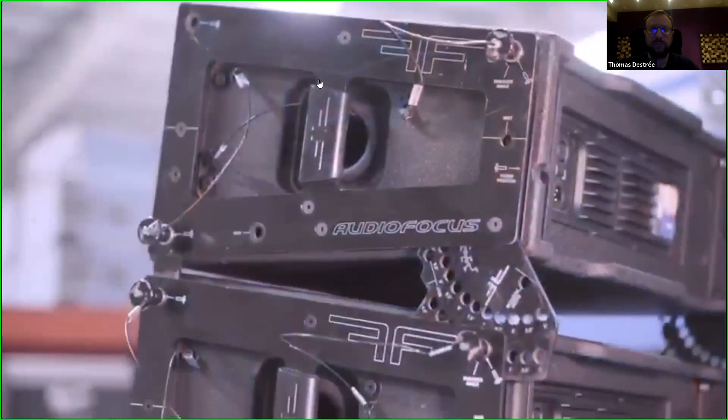What we have currently in our inventory are a bunch of Ares 8s, B18s, MTX 218s and CM15s. The reason we went with Audio Focus is because of its size to power ratio, as well as the fact that they are an actively powered system helps us deploy the system much easier, quicker in most venues around the country.

So the reason we went in for the Ares 8 system and this little package is because it packs a lot of punch in a small package. The size to power ratio is brilliant and helps us to cover most venues with pretty much no effort at all. A big PA with a small delay stack in larger venues, whereas just the flown system, the LR in mid-size venues works absolutely perfect with the Ares 8.

So here at Reynolds, we like to spend good time in pre-planning and prepping our systems for shows to come. With Ease Focus, that enables us to do that very easily with the Ares 8. We can pop in a system, pop in venue dimensions, get a prediction done so that we know exactly what we're going to hear once we're in the venue. It really helps speed up the process, and Ease Focus all the way.

The Audio Focus Ares 8 and B18, one of my most favorite combinations from the Audio Focus Ares line. I really love the way this system integrates with each other. It's very easy to either ground stack or fly the system. The way the hardware is integrated with the box is awesome.

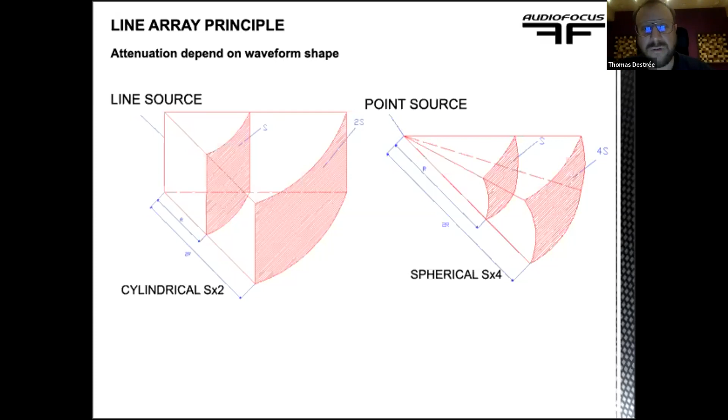So the main aspect of this and the big advantage is that the dispersion becomes cylindrical instead of spherical. So when you double the distance, the volume of the sound expansion is 2 times less. This means that we only lose 3 dB when doubling the distance instead of 6. It's the main advantage of line arrays, and this is how we control the sound in the front.

So to be able to reach those goals, we have to fulfill some criteria. Let's say a line array will need to go for 95 dB at 30 meters. A point source would be way more up in volume at 1 meter than a line array. So obviously all the audience area will be more homogeneous with a line array than with a point source.

So to be able to do that, the line array must fulfill some criteria that have been developed by Christian Heil and Marcel Urban in the 90s. Those criteria are that the total sound source must be planar and in equal phase. The total surface of the speakers must be at least 80%, and the speakers must be really close to each other, because if the space is more than half the wavelength, they don't behave like one speaker only. So the goal is really to build up one speaker. A line array is considered like only one big speaker on each side of the stage.

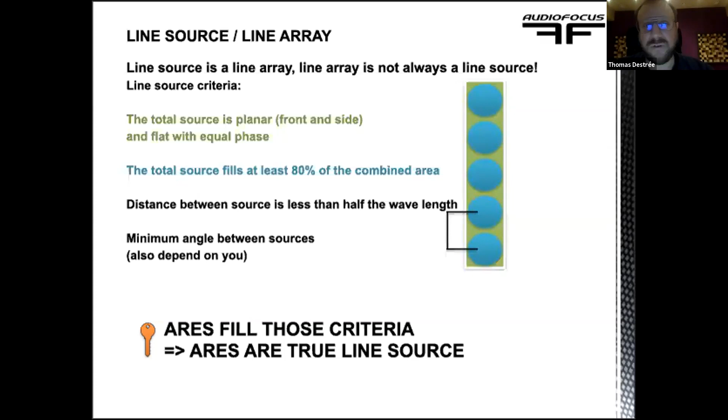And we can say that Ares 12 and Ares 8 fulfill those criteria. So Ares 8 and Ares 12 are not only line arrays, but are also line sources. Line sources still have some limits. The limit of a line source has been observed and calculated from the optical aspect of physics. And those zones are called the Fresnel and Fraunhofer limit.

In the Fresnel zone, the line array behaves like a line source. And after that, it starts to behave again like a point source. So it looks a bit like this. This is the near field, and this is the far field. So it acts like a line source there, and starts to act like a point source after the Fresnel-Fraunhofer limit.

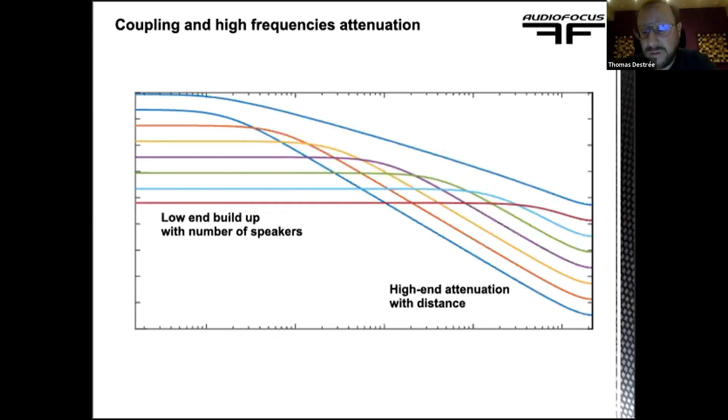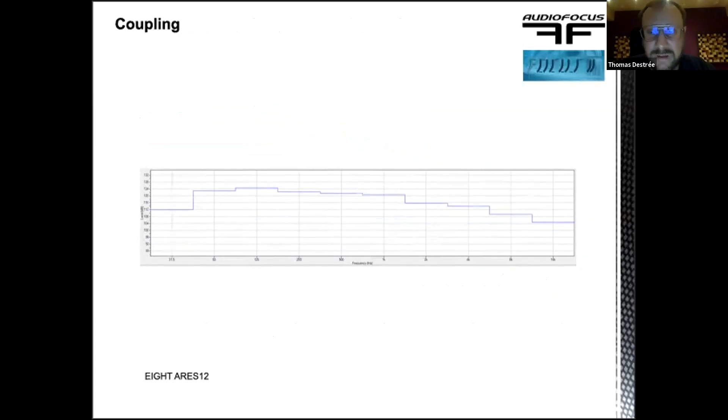So for example, this is one RS12 alone measurement, and this is 8 RS12. So you can really see we are like plus 20 dB at 125 hertz. And if we keep the simulation going, you see the RS12 being flat at 16 meters and falling in the high end at 64 meters.

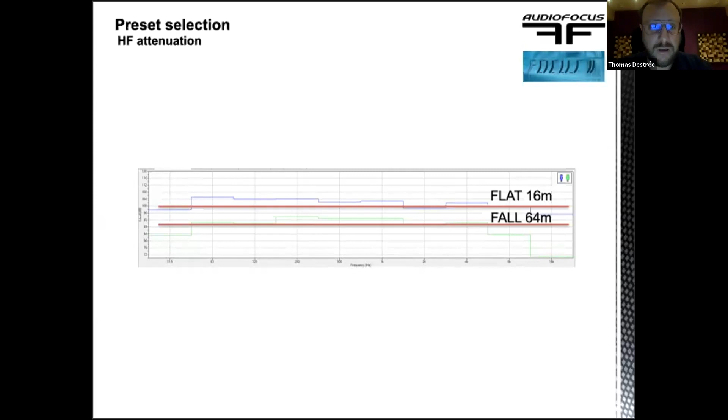So how does Audio Focus manage this problem, these acoustical rules, in their speakers? So we got some presets, and presets are the solution. So inside the presets of the RS8 and the RS12, there are two banks. So the first part of the name of the preset is the preset number, P16, for example. The second part of the name is the number of cabinets you use. So in this example, you use 12 RS12 per side, or at least in one array, and then the distance.

So obviously, the top cabinets will shoot further away in the far field, while the bottom cabinets will shoot in the near field. So the high-end reproduction of the bottom is not the same as the top, as we've seen before, because of the distance compensation. So if you load the right preset and deploy the system as it should be with the preset and the simulation, you obtain a really flat response everywhere in terms of SPL and in terms of frequency response.

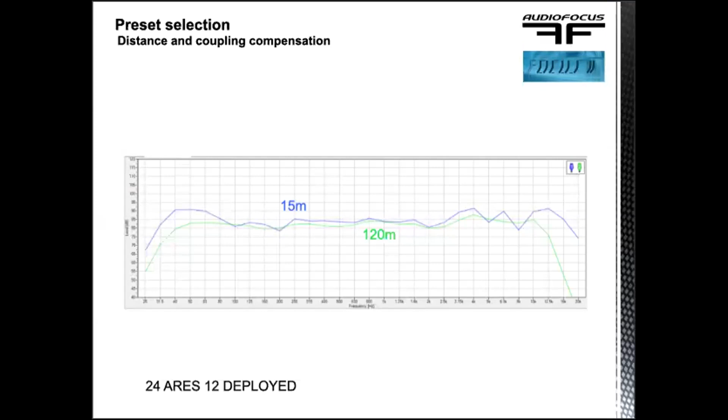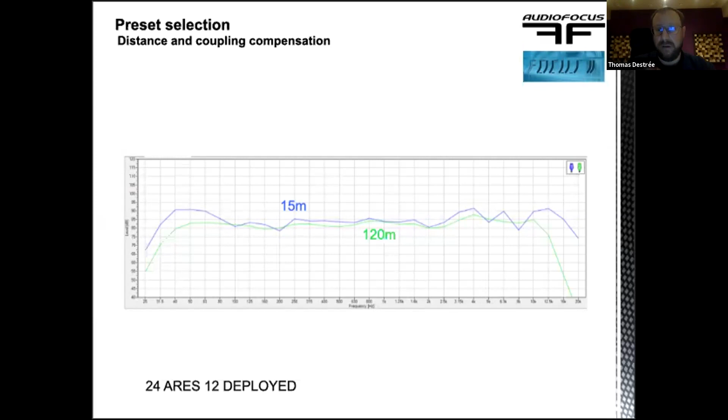So for example, here you can see 24 Ares 12 deployed, and it's almost totally the same response, at least between 100 hertz and 12 kilohertz, between 15 meters and 120 meters. So it's really a huge improvement based on plug and play presets that you don't have to calculate with Smaart or anything in the tuning on the field. So everything is done before the show, and you just plug and play the system once you're at the venue or at the outside gig.

So what is inside the RS12 and RS8? So the RS12 is a three-way line array. The high end has two cylindrical transformers. The shape of the wave going out of the high-end driver is spherical from the start, and the goal in building a line array is to have a ribbon shape of the high-end output at the end. So the top and bottom of the transformer are really close to the next one on the other speaker, so it behaves like one big vertical speaker arrangement. So this is the transformer. It's a bit of a diamond shape inside.

The mid is reproduced by an OEM Eighteen Sound 3-inch driver. So there are eight 3-inch drivers. We chose a 3-inch instead of a bigger one because the centers of the speakers are closer to each other with a 3-inch, so the line source criteria are better with this kind of speaker. And then the low end is a 12-inch OEM Eighteen Sound also. It's a really powerful speaker, one of the most powerful and respected 12-inch speakers in live pro audio.

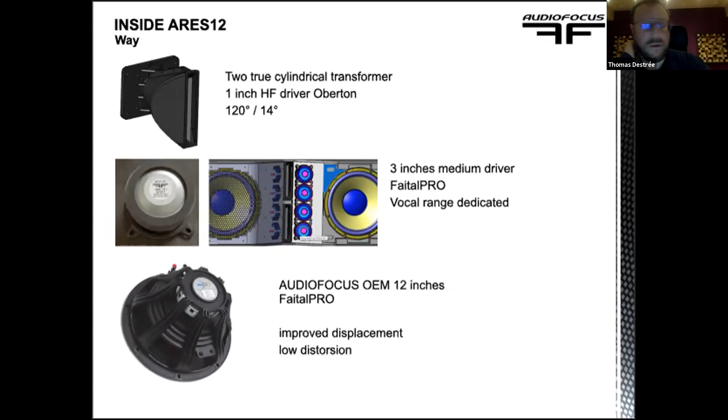The RS8HQ, and the RS8A also, is a bit the same. So it's the same high-end cylindrical transformers with a 3-inch HF driver from B&C. And the low-mid is 8-inch B&C speakers also.

So now about the amplifier. Most Audio Focus products are active speakers. We call them active speakers because the amplifier is inside the same cabinet. All our amplifiers are from Powersoft. Those are Class D PWM amplifiers, so pulse width modulation. The goal of PWM Class D is to have a lot of efficiency with the integrator, and you have like 95% efficiency. The Powersoft technology is also PFC. PFC means power factor correction.

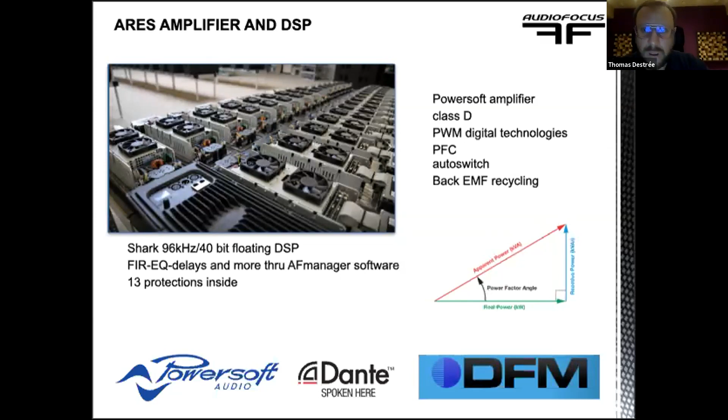So this is in red the power you have to give to the amplifier, and this is the power it will give to the speakers, plus the inside usage of the DSP and the fan, but it's really negligible. So the goal is to make this angle as small as possible, so the apparent needed power is almost the same as the real power you need. So this is an overview of how PFC works.

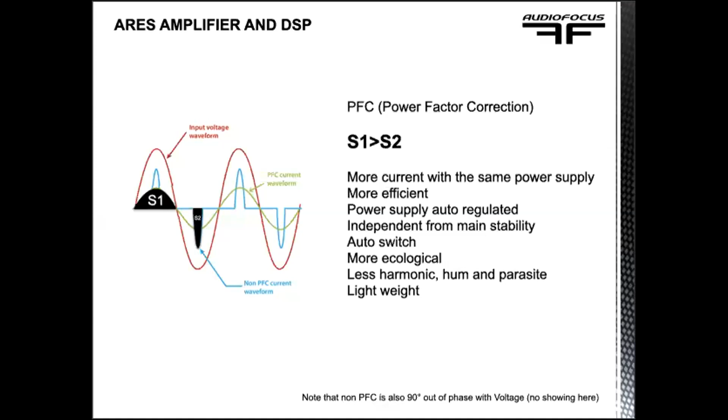Also, there are a lot of other advantages of the PFC. It's obviously more efficient, but also the power supply will regulate, because the input voltage is not always perfect, like on this red drawing. The power supply could have a lot of harmonics and problems, and also fuel generators have frequency variation, things like that. This is not a problem for the PFC. PFC will regulate all of this and clean all the input of the PSU.

Also, it's important for us that more efficient also means you need less current, so it's ecological. It also filters everything in and out of the PSU, so you have less harmonics or less parasites, and it's lighter weight because you need a smaller amplifier to do the same job as a big amplifier.

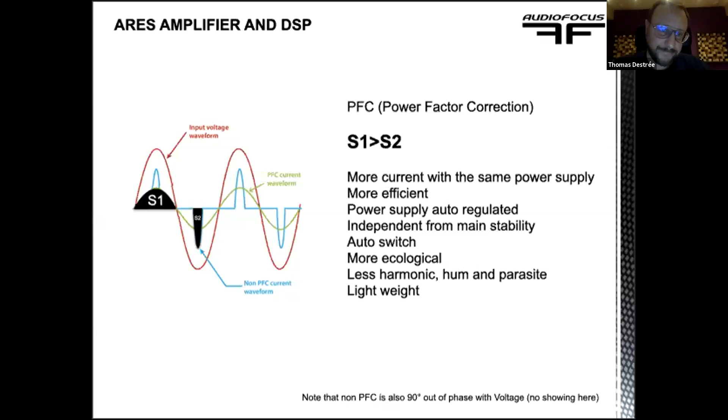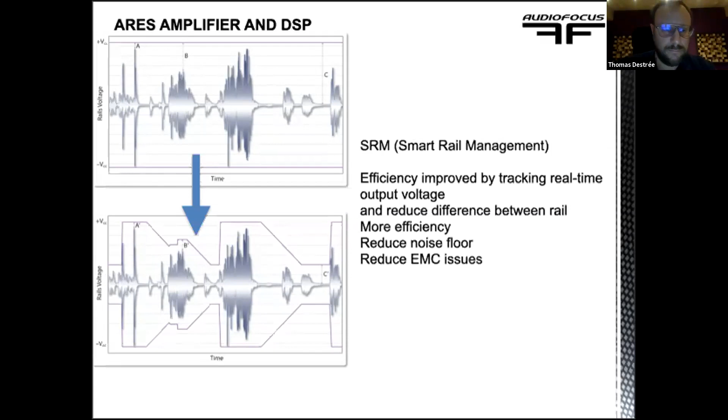So those slides were about the amplifier. The other part inside is the DSP. The DSP is a DFM DSP made in Germany with local components. The DSP has a 96 kilohertz sampling rate with 40-bit floating point.

It's basically a 32-bit mantissa with an 8-bit exponent and a sign bit. So the dynamic range, because we're talking more about dynamic range than signal-to-noise ratio, is really, really high. It's so high that you don't have noise from the converter; the noise just comes from the electronic components of the DSP. The DSPs inside DFM are made by Analog Devices, the famous SHARC DSP.

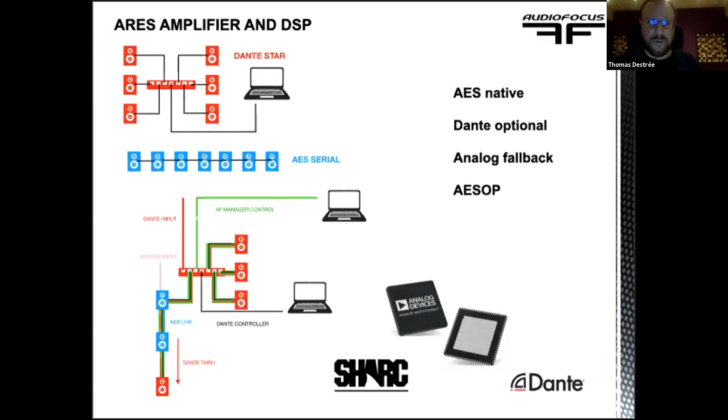Also, if I can go back, how do I go back?

Yep. Also, the DSPs are asynchronous DSPs. This means that they don't necessarily have to have a clock. They can clock on themselves. And so it's better for digital interconnection between speakers and with the mixing desk. And so it can handle a different sample rate more easily than other DSPs.

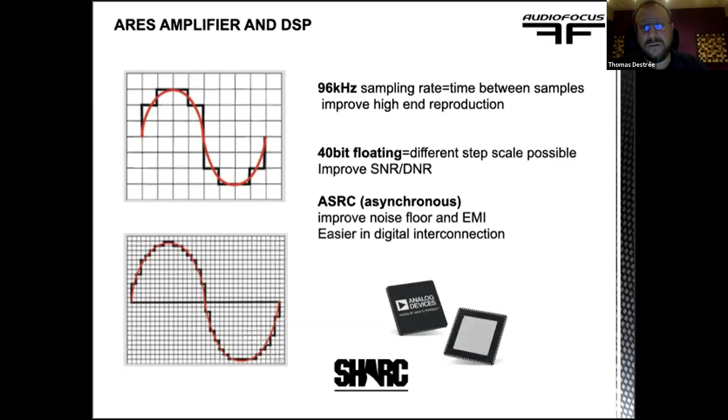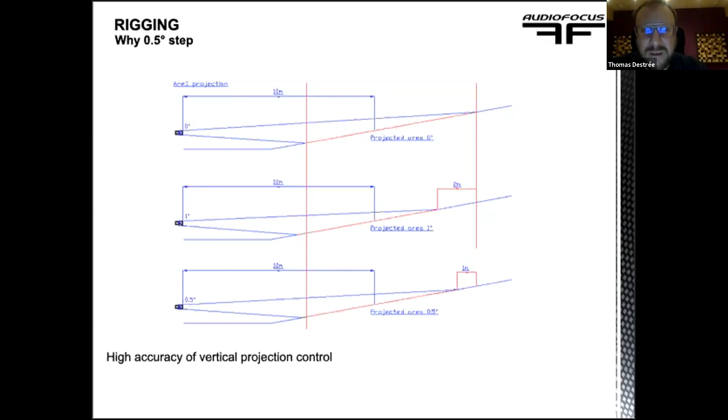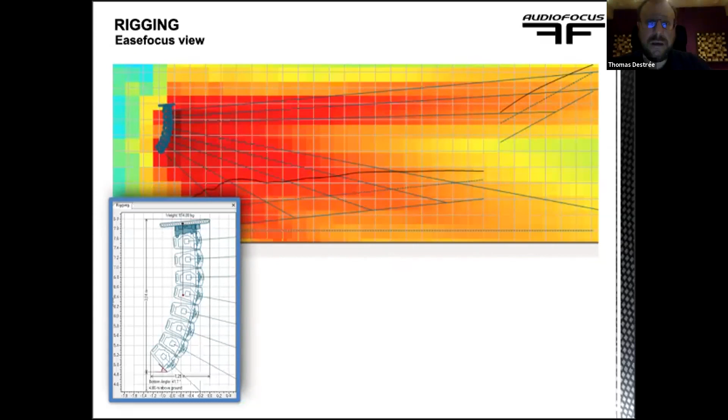Then the rigging can go up to 14 degrees. So we can split a beam of ARES12 in 2 separate parts, for example, for a balcony and a floor audience area. You can see the result on the SPL on EASE Focus. And so the sound will go where you want it and not be wasted in the middle of the two areas where nobody stands. See, this is a real life application in Belgium with ARES12.

And so, for example, in this particular theater, which is almost 1,000 seats, a difference of 0.5 degree means 2 or 3 rows, so it's like 75 seats. So 0.5 degree is a precision needed. Also, the 14 degrees give the ability to split the angle of the beam and only put sound on the balcony and on the floor and not in between. So yes, the rigging is quite versatile.

Now about the subwoofer technology. All Audio Focus subwoofers are with speakers in a direct radiation with bass reflex and also in transmission line. So a lot of energy goes back inside the subwoofer because obviously the speaker is moving both ways almost the same. So not to lose all the energy inside the speakers, the best solution for us is the transmission line.

So this means that in front of the speakers, 90% of the front is an emission zone. Not working always at the same time, because the bass reflex works at certain frequencies and the transmission line at others. But this is the way to make it the most efficient possible. So also we put a lot of braces inside the subwoofer to keep everything really tight together and really strong. And you have no moving part, you have no vibration or mechanical noise that could parasite the sound you want to reproduce.

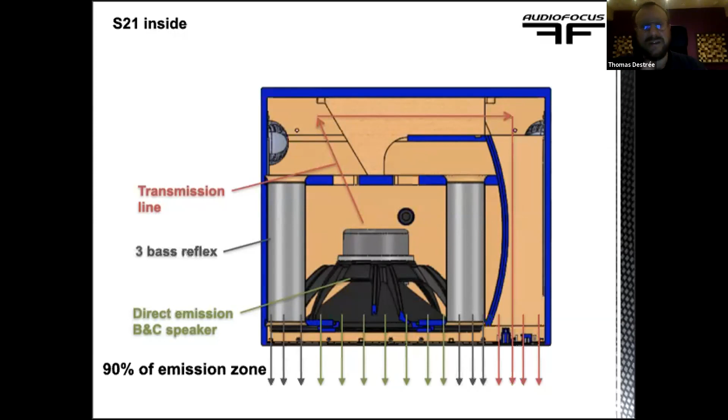So this is an inside view of the subwoofer. The subwoofer has the same amplifier and DSP as all the range. And now let's talk about how the system works together. So we think of the product as a solution for touring or for installation and sound reproduction. So we want to give the possibility to work as fast as possible. This is why we have active speakers with no need to cable and with presets inside. And also we want every top to work with every sub and be time aligned and phase aligned by default. Plug and play, they can work together.

So you can build two-way speakers with the VENU and the CM and the FRX. You can build three-way speakers with the subwoofer working with every top, and four-way. The most obvious way to do a four-way is the ARES12, which is a three-way, with the S21 as the fourth way. But every sub from Audio Focus can be a sub, but can also be a bass. So it's like the B18 that Sohail introduced in the previous video, that is a bass reinforcement for the ARES8.

The S15, the S21, the S18, the 218 HQ can also be a bass subwoofer. So if you put your subwoofer in a bass configuration by only loading the bass preset, you mix it with the S21 in infra and a top, and you have a four-way system. So you can really build the system in all the ways that you want and in all the configurations possible.

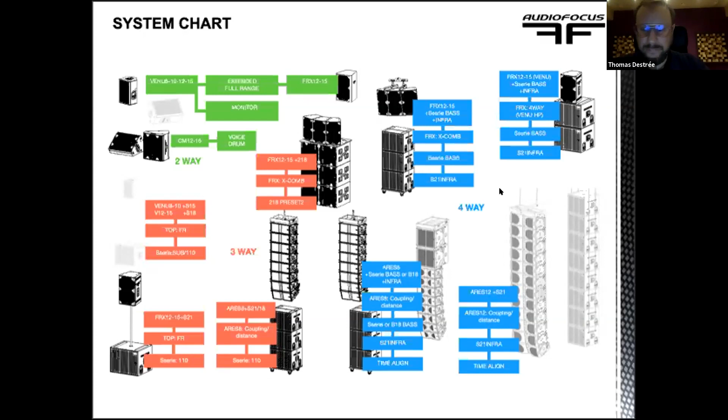So like 95, 97% of the speakers that we sell are active speakers with the amplifier inside. So for us, it's the state of the art, with the plug and play, with the fine tuning possibility, because it takes less space, because it's less cable, because there is no mistake possible with loading not the right preset inside the amplifier, because the power of the amplifier will always be perfect, because you won't also buy a big amplifier to drive all your speakers. So if you have a line array with a big amplifier, this big amplifier will also drive your smaller monitors. It makes no sense. It's better to have an amplifier matching the power needed inside the speakers.

Also, the cable that takes space in the truck also takes space on the stage and might be really long. And some, especially in the low end, you could have a damping issue or different sound reproduction because of different size of cable. Still, we provide a bi-amp solution or passive solution with our own amplifier and processor.

So the amplifier could fit some solution if you already have some cable installed inside a building and you can't put some new power supplies, things like that. You have the bi-amp solution. This also perfectly works for touring. We do provide some amplifier rack with the power conditioner, amplifier inside, and everything ready.

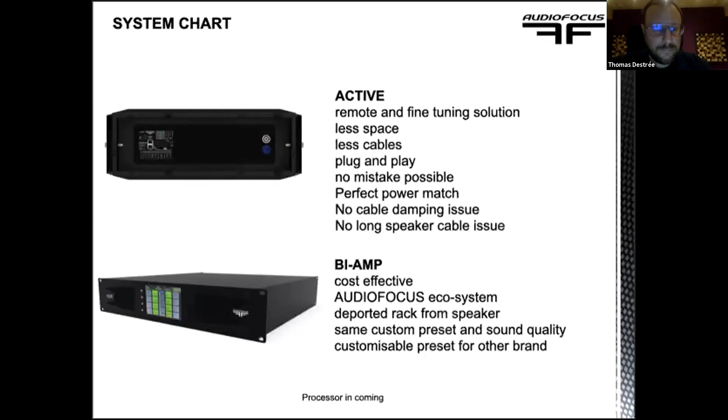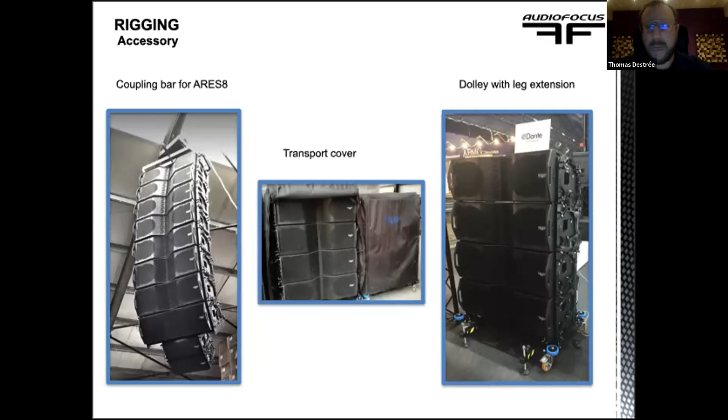The other part of the system is all the rigging elements. So we provide rigging for the ARES12, for the ARES8. We have some rigging to be able to stack the speakers on top of sub. We have coupling accessories in ARES12 and ARES8. We have also all the transport dolly, the rear dolly, back dolly, the fly case, the transport cover, rain cover. You have a lot of different options to build your kit as you want.

Here you can see some dolly option for the S21 on the back with a hole, so you can still have the control if you want to let the dolly in, or on the bottom, so you have a ready to rock system out of the truck. So you can also leave all the cable in place. This one has a brake on all the wheels, so the dolly with powerful magnet also doesn't make any noise when you are working with the dolly left on the subwoofer. So also all the subwoofers are flyable.

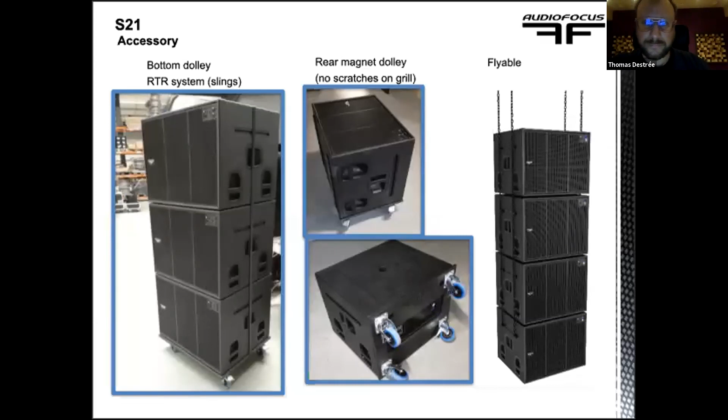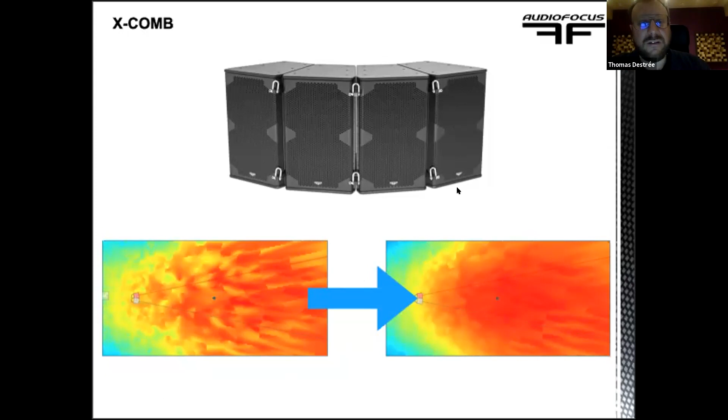So about the X-COMB technology. X-COMB is an audio focus process to manage the constant curvature angle from FRX and also CM series. So it means that if you stack ordinary speakers next to each other, you will have this kind of result. This is the simulation inside EASE Focus with the actual FRX. If you load the right preset for the X-COMB technology, this is the result that you will be given.

So this provides a homogeneous horizontal sound reproduction of the speakers. It's a psychoacoustic procedure that I can't tell you obviously how it works in details, but we are canceling problems to make it perfectly homogeneous. Also, you can use as many speakers as you want, or at least you need for this configuration. And it's easier to do because those are self-powered speakers.

So if you want to do some X-COMB with an amplifier, you will waste a lot of amplifier channels to load different presets in each speaker. But with active speakers, there is no waste. You just load a different preset on each speaker and it will give you the result immediately. So really plug and play, and a big advantage of having active speakers with a preset bank inside from the manufacturer.

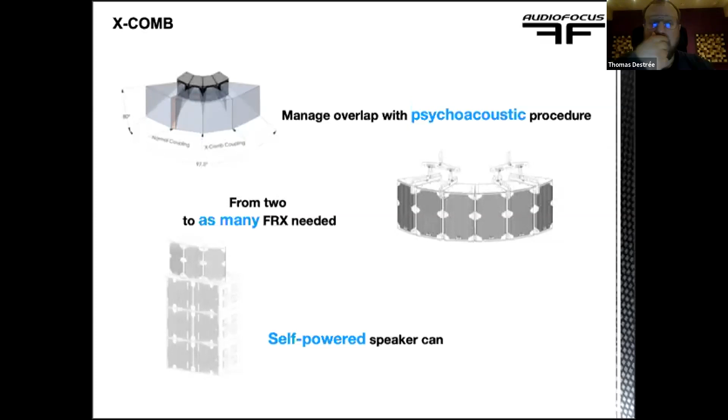So you also can use the FRX horn in both directions with the X-Comb technology. So if you need to open a bit more the coverage on only one side of your system on X-Comb, you can. The only thing to do is to load the right preset. It's an asymmetrical way of loading the preset, and that's all.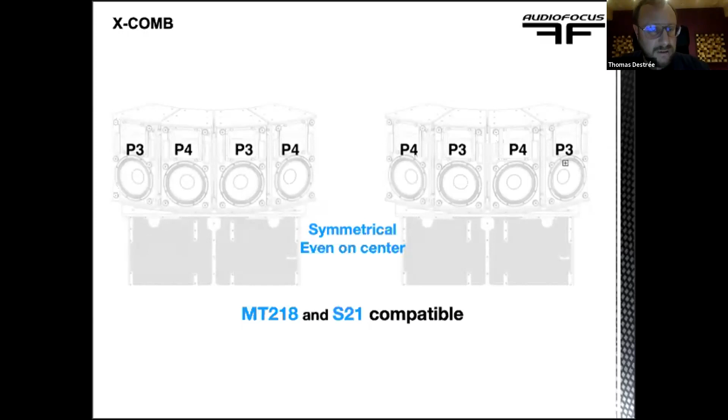It will work again with all the subwoofers of the range, the S21, the MT218, also the S15 and the S18, but those are quite smaller subwoofers. We recommend for X-COMB, that is quite a big setup, bigger subwoofers like the 218 or the S21. And you can also build a four-way system with a subwoofer that you would load the bass preset inside of. So this is how we control and how we give solutions with the preset.

Another difficult point to manage in live sound is the low end. The challenge with the low end is the size of the wavelength. So you could picture the sound like a river stream. It's not really scientifically correct because sound is a particle wave and not a stream, but it works to understand.

So if you put a wood stick inside a stream, if the stick is small, like here, the stream of the river won't see the stick. But the bigger the wood, the more the stick will start to create an interaction with the stream. So subwoofers reproduce really, really low end, especially the S21. So the low end frequencies have really, really big wavelengths, like 17 meters wavelength. So for those kinds of wavelength, the subwoofer is like transparent.

It's like the sound doesn't see the subwoofer, and this is why low end tends to be more omnidirectional, because the size of the object, that is the subwoofer, is too small regarding the wavelength. So the first solution is to put more subs together, not only for the power, but to be able to control the low end. It's exactly the same thing as the line source. It's a line array of subwoofers stacked on the ground, but it's an array.

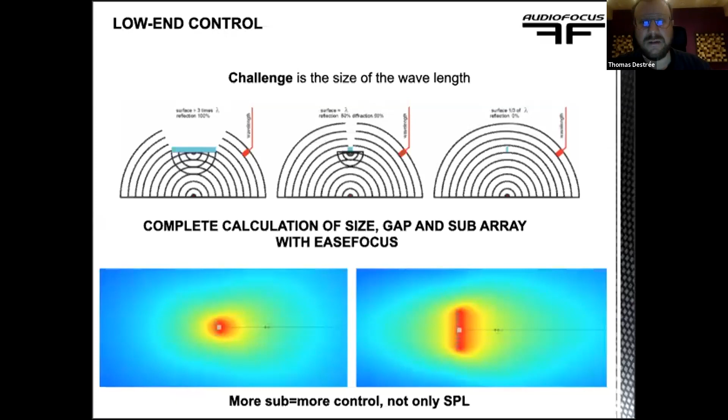You can see here the result on EASE Focus with 3 subwoofers, and here it's with 8 or 10 subwoofers. You see how it starts to control the low end in the front rather than being more omnidirectional. Another way to control the low end is the end fire solution. So the end fire technique is to put 2 subwoofers together but apart from each other. So there is a space in between, and they all together project the sound in the same direction. So the goal is to reinforce the sound in the front.

So the second subwoofer has to be delayed by the time in between the 2 subwoofers. So when this one plays first, when its sound hits the acoustic center of this one, it will be emitting exactly at that time. So they are perfectly in phase on the front. But what happens is this one will emit on the back, and with this time delay plus the other way around, the front subwoofer will emit out of phase on the back, so they will cancel on the back.

This is only true at the frequency that is related to the space and the delay between subwoofers, but still the wavelength is so big that you can cancel quite a large region of the spectral reproduction of the subwoofer on the back. So in those drawings on EASE Focus simulation, you can see 2 rows of S21 without the end fire technique, and this is with the end fire technique. And you can see how the sound is way louder on the front than here, and how it totally cancels the back.

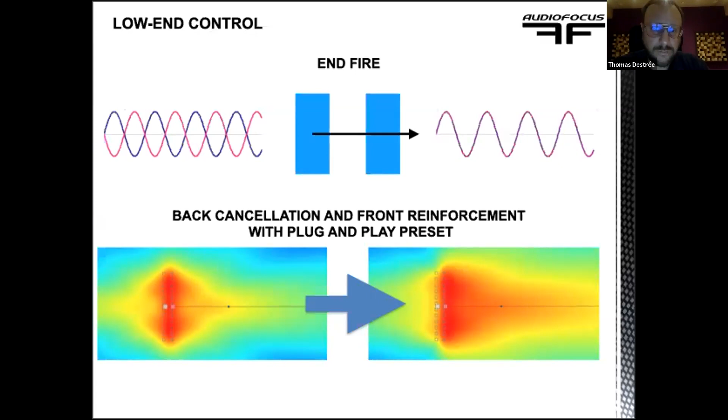Another way to cancel and control the low end is the cardioid subwoofer technique. So the way it works is that you have a general ratio of 1 in 3, so 1 to 2. You put a subwoofer the other way around, with a delay and out of phase. So it will cancel all the low end in the other direction, which obviously could be the stage, or also could be some neighborhood where you don't want to put the sound because there are festival regulations. So this is also a really efficient solution. The cardioid solution really cancels a lot of sound.

You can see here a stack of S21s without the cardioid and with the cardioid. It's really, really canceling everything. Still, the subwoofers that cancel the sound on the back are a bit wasted, because their only purpose is to cancel the back. Again, all Audiofocus subwoofers provide a cardioid preset, so you just have to stack the subwoofers, load the cardioid preset, and it's done. You have a perfectly working cardioid. These are real EASE Focus simulations, with S21 or S18 presets loaded. So this is really how it will behave.

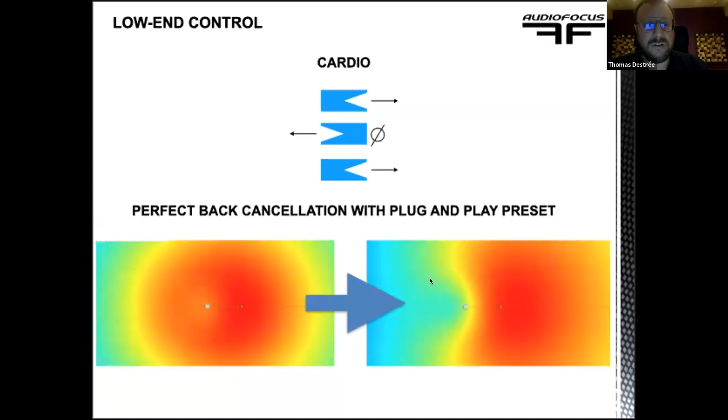The last thing on low end control: canceling the back is one thing. So you have focus in one direction on the subwoofer, but also you want to be able to open the sound around, because when you stack your subwoofers in line, you will focus and create what is called a power alley in the middle of the venue or of the outside gig. And if you want to be able to open the subwoofers, the native technique will be to create an arc with your subwoofers.

So you would arrange your subwoofers in a portion of a circle, in an arc like this. But this will take much space, like 2 or 3 meters deep on the side. So the technique is to create a virtual arc. For this, you want to apply a delay on those subwoofers on the side that will be related to this angle and the cosine of this angle on the side, and this will be translated mathematically into a delay, with regard also to the size of the circle defined by this line.

Those are mathematical processes that you don't want to compute yourself. You just use EaseFocus. You put the virtual arc subwoofer technique on, you give the size of the array and the number of subwoofers that you want to use. You decide the angle that you want to open, and then EaseFocus will give you all the delays resulting in this technique. So you don't have to do any maths. Everything is plug and play.

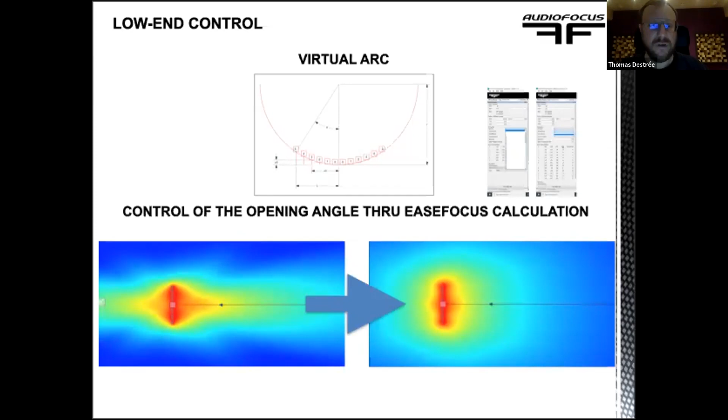On this picture, you can see S21 being put in line for an arc subwoofer technique. And on this one, it combines the end-fire solution plus the virtual arc delay. So you can work with the two together. So those are things that only active speakers can do with this ease and plug and play, without external processing, without analysis on site. So it will save you a lot of time, it will be really easy and take less space.

So I think, Jay, I might be a bit late on my presentation. So I will try to speed up a bit about EaseFocus and AF Manager.

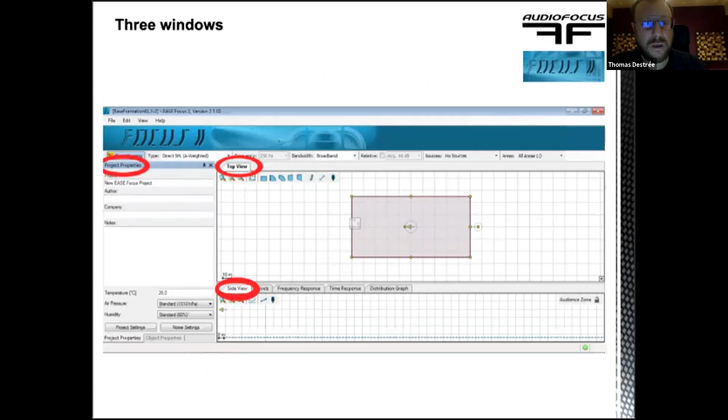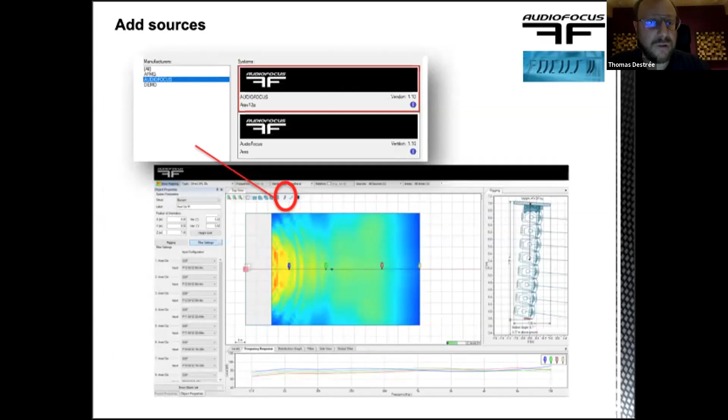So EaseFocus is Audio Focus software to predict, compute and calculate the gig and the prediction of the angles. So it's a working software, but it could also be a commercial software, because you can show your client different solutions with different speaker numbers, different subwoofer placements, etc. So basically there are three windows: one top, one side, and one with the project properties. The first step is to put some speakers inside the software. Here we can see Audio Focus Ares12a. Then you just click auto splay. Once you put the speaker in the software, everything is set to 0, everything is straight.

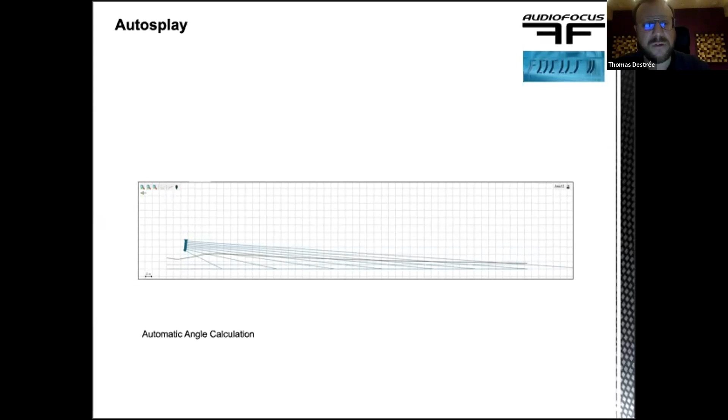And when you click auto splay, the software will, with regard to the SPL, sound pressure level, algorithm, calculate the surface and give all the height, angles and pinpoints for the speakers, and that's it. Also, EaseFocus can go really far in terms of design. You can have a lot of balconies, a lot of angles of audience area, and do really complicated and difficult shapes with EaseFocus.

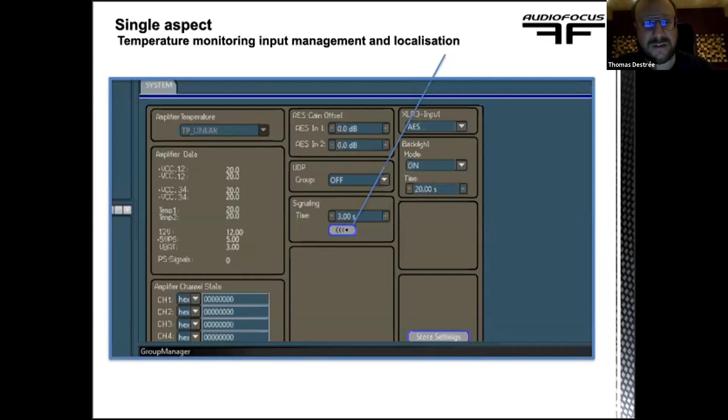AF Manager is the control software of Audio Focus. You can control each speaker individually, one speaker by one. You can change the volume, input gain. You can change delay. You can load some presets. You can monitor all your speakers and see the input level, the output level. You can change if you are working in analog or AES, the synchronization of the AES, if it's embedded or bridge. You can also flash your speakers to localize which speaker is which and make all the LEDs blink so you can see which speaker is talking to the software.

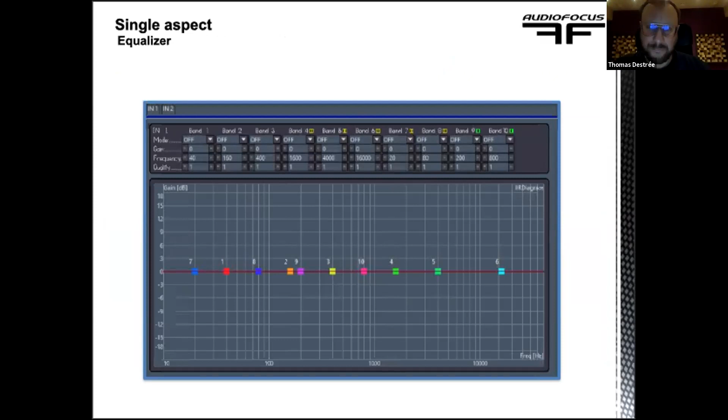Also, each speaker has a custom 10-band user EQ. It's not the corrective EQ that we apply. It's really a free, flat user EQ that you can use for tuning a venue, an installation, or a gig. So AF Manager works on a fixed IP architecture. It means that a speaker has an IP and it stays.

The computer has to be in the same range, obviously, as the speakers. But this doesn't mean that all the IPs should follow each other, and this also doesn't mean that the IPs should be in the high range to be discovered by the software. So if you auto-scan your connection through the Cat6 cable that connects all your speakers, you will automatically filter and see only the Audio Focus speakers connected, or the processor or the amplifier. You won't see other computers, switches, devices and networks.

It's a UDP process. And also if the IPs are not correct, it will tell you which ones are to be changed, and give you the option to click automatically reassign the IP, so it will fix all the IPs. Everything is also an automatic process for the update of the preset. So if we release a new library preset, the software will tell you that you need to upgrade the preset library, and it's the same for the firmware.

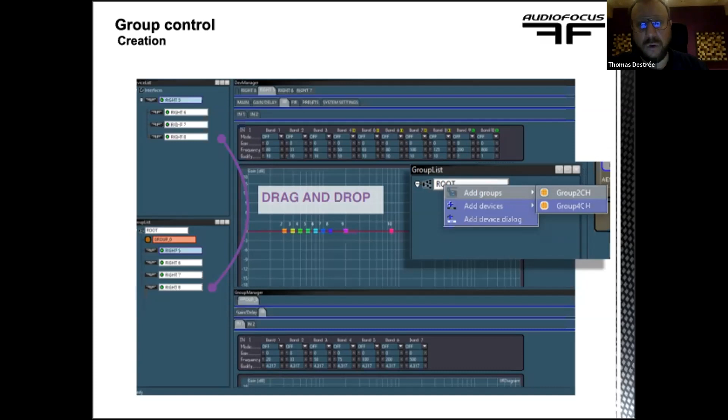And the group gives you the same functions as the single aspect. So you have a 7-band EQ on the group, and you don't lose the 10-band EQ on the single aspect. So you can tune each speaker separately, and then again tune the group. And you can also do some subgroups. So you could have a subwoofer group, a front fill group, a main front of house group, a delay group, and then inside the main you could group the left and group the right in an individual way. So there is a lot of dynamic triggering inside the group, because you can also delay, change the gain and mute a total group.

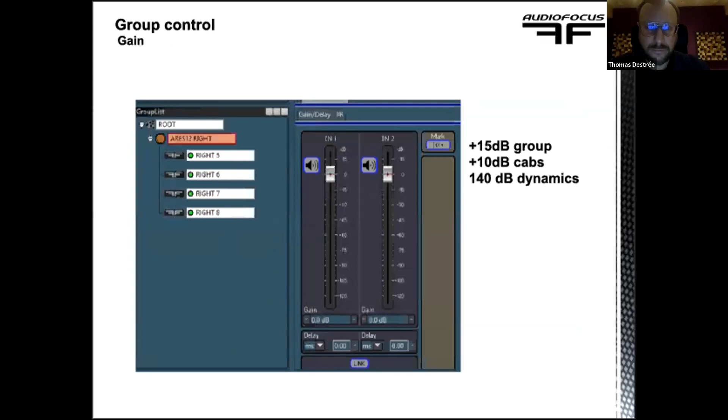The last important point about AF Manager, Audio Focus Manager, is that you connect to a system, you tune your system, create some groups, etc. When you have created your groups, it's called a system. When you have used the system, you can then disconnect. And if someone else connects with a new computer, he can scan the network and see the system that has been created by someone else.

The groups, the EQ, etc. parameters don't have to stay in an external processor. It's inside all the DSPs. They know in which group they belong. But the other way to work is that you can create a virtual group on your computer at home, at the office, and then go to the gig and send your group to the speakers.

So what does a report from EaseFocus look like? Once you have finished a simulation in EaseFocus, you want to export that data to something that you can transmit and give to the team, the rigging people, the PA tech, etc. So this is called a report, and it's a PDF file, so it's really easy to read it on a smartphone or a computer or a tablet. Everybody on Windows or Mac can open a PDF.

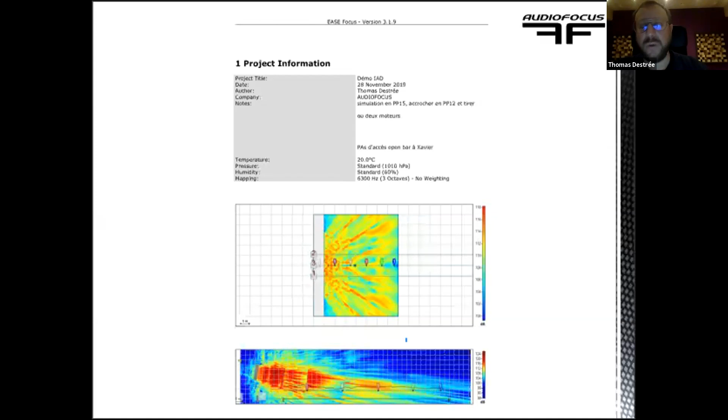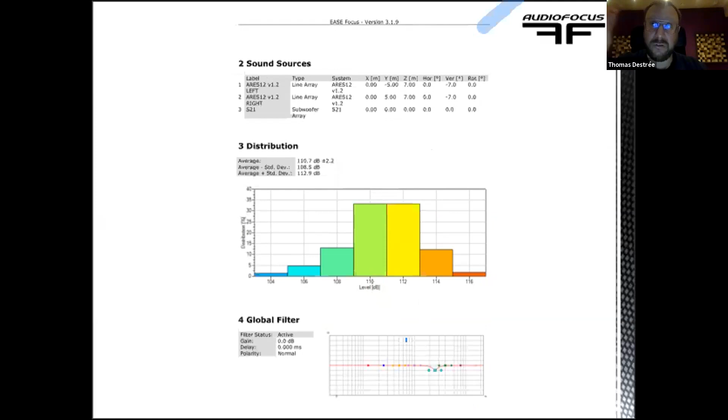If you load the speakers, of course, obviously before the show at the factory, they will remain even if you shut down the speakers. It's the same for the group EQ, fine tuning, etc. Everything remains.

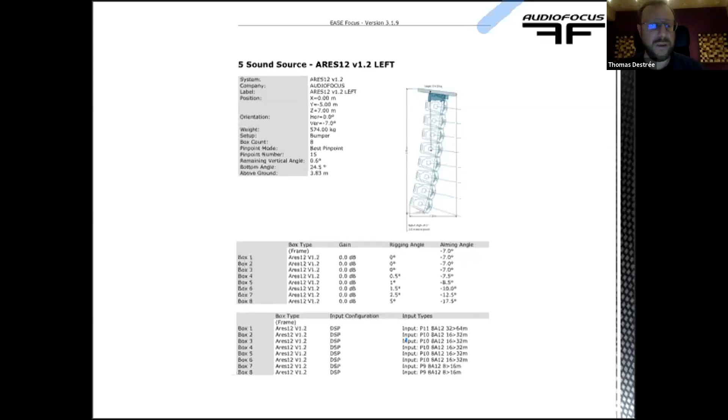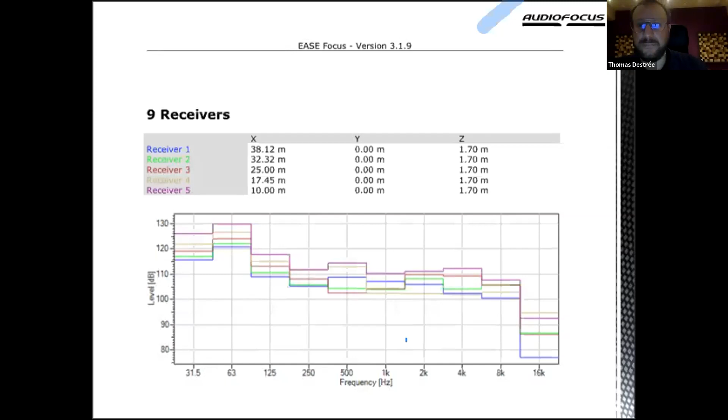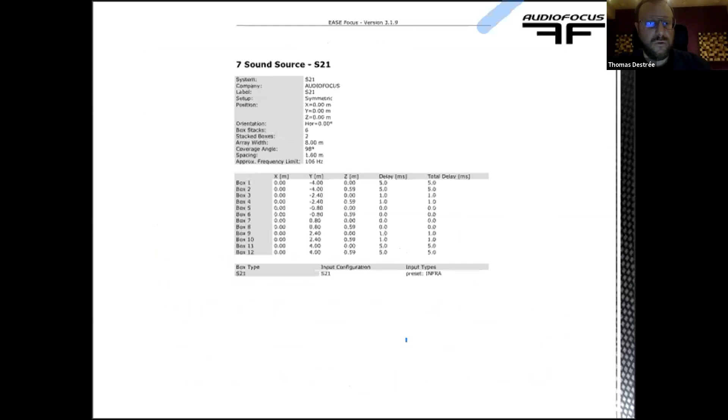Voilà, so AudioFocus is focused on solutions and not only speakers alone, because of the presets, because of all the different plug and play aspects, because of the active version and protection, but also because we are a manufacturer. This means that we really build the speakers ourselves in our factory in Belgium. Everybody is under the same roof and everybody knows each other, from the production line, the HR, the marketing, the R&D, the design software, the logistics, the CEO, everybody is there.

This makes us also really flexible and gives us a lot of adaptability in production. We can produce and stock the speakers in a much more efficient way and optimize the stock. And this is felt by the client on the cost. This is a way to reduce the cost, and a way to produce really fast and give really fast solutions to the client that orders some speakers.

So globally, this is all the solution we provide with the speakers themselves, with the range of speakers that we have, but also with the training and with the reliability. We have some speakers that have been running for years and years. We have less than 1% SAV globally on the speakers. We also provide all the related equipment, like we build the cables inside the factory. We also build the fly cases for the kit. We build all the metal parts of the speakers inside the factory.